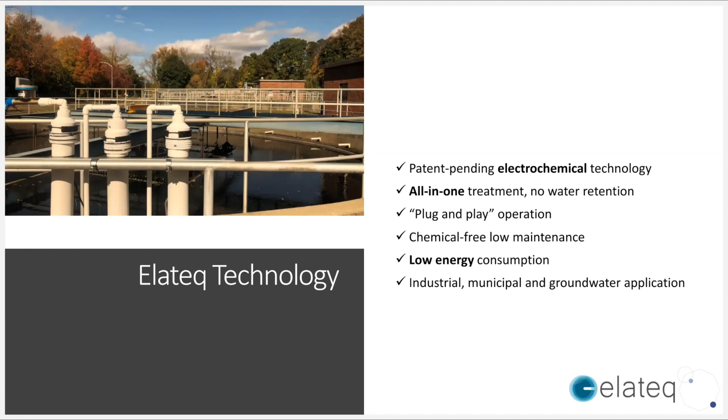The core of our technology, as I mentioned, is electrochemically based, and the innovation behind it and the uniqueness is that it merges different concepts of electrochemistry. I'll just mention a few. It's the use of 3-dimensional electrodes. In our case, that's our proprietary carbon material. It uses bipolar electrochemistry, which is a concept that is used in some systems separately, as, for example, electrocoagulation flotation systems, and conventional electrochemistry used in other applications. So this is something that we managed to merge together to create this powerful technology that can remove a range of contaminants at the same time.

Just an example, if we talk about organic pollutants, our system degrades them or transforms them to harmless byproducts. Whereas when we talk about metals, since we cannot degrade elements further, metals are actually securely stored within our electrodes. And upon saturation, these electrodes actually become a valuable resource for one of our partner companies that extracts metals from different solid media. So this is just to give you a sense that as we are looking at our technology and applications, we are really taking this sustainable approach to close the loop when it comes to waste, when it comes to energy use, and really be in this water energy nexus field as much as we can with the novel technology.

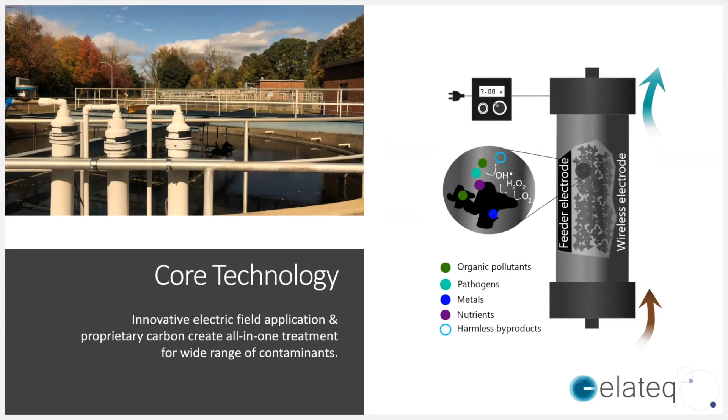Since Elateq was founded, we actually incorporated last year in March, but we established Elateq in 2019. We were awardees of a couple of Massachusetts Clean Energy Center awards, simply as they recognize that our technology is in this water energy nexus. And I'll talk a little bit more about this Innovate Mass project, which is actually a local project to Amherst and of, I think, relevance for this group.

As I move forward, I structured this to introduce our technology in terms of applying it in two different configurations. One is as a flow reactor, as you can see here in these photos, and the other one is something called permeable reactive barrier configuration, which is more applicable for mitigating non-point pollution sources, and I think that's relevant to mention here. And I'll talk a little bit more about that as we move forward.

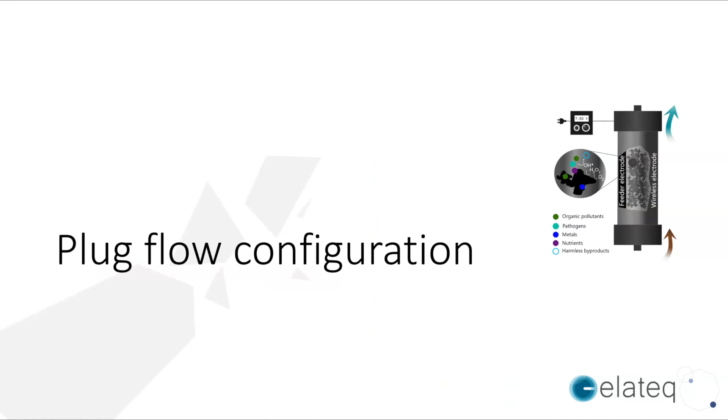So when it comes to plug flow configuration, that means that we use pumps to pump the water through our system. Contaminants get removed, degraded, and then the clean water comes out of the reactor. And this configuration has been so far used in different piloting, lab scale, and demonstration for a really wide range of wastewater. Our very first pilot was at the South Hadley wastewater treatment plant that was funded by Massachusetts Clean Energy Center, where we introduced the 3,000 gallons a day capacity pilot system with the goal to remove E. coli and lower the amount of nutrients in the secondary wastewater, which we successfully achieved over the course of 5 or actually 6 months of the piloting phase.

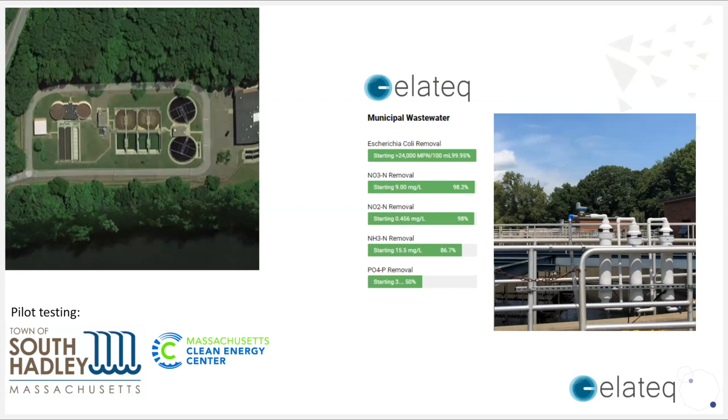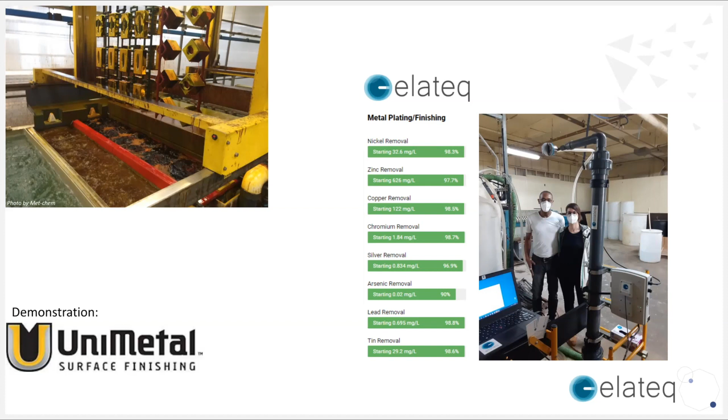Further, what I also thought might be of interest here is the demonstration of our unit at a metal plating or finishing facility. So this is an industrial application of our plug flow configuration, where even though the facility had their own wastewater treatment, the majority of metals, especially chromium, zinc, and nickel, were still above the permitting levels at the facility. So our system achieved these permitting levels, and below that, during the course of 6 months of our demonstration at this facility. But also in addition to that, we managed to lower BOD levels as well as nitrate that were of concern at this facility prior to discharge in the water body.

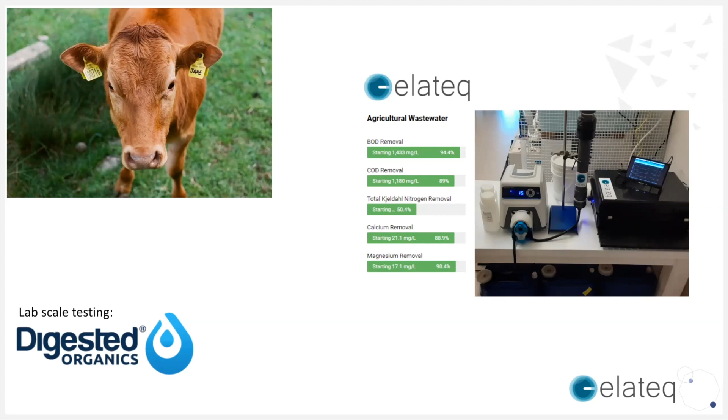And this one is actually also interesting. It's a lab scale testing that we conducted, but it was done for a company that introduces treatment trains for treatment of agricultural wastewater. These results are related to dairy and chicken farm wastewater. So our system was tested as an addition to their current treatment train, where we managed to achieve the desired levels of BOD, COD, and some of the nutrients that they needed to lower prior to finalizing their treatment system as well.

So these are all plug flow, as I mentioned, those are more applicable for point sources, but when we talk about non-point sources, they're a little bit more difficult to address, and permeable reactive barriers, PRBs, are often used for capturing plumes in groundwater. So some of these non-point sources can be mitigated this way. And the principle is that the PRB is constructed and installed permeable to the water flow. The water flows through whatever the reactive media is, depending on the contamination, and then the clean water is leaving the barrier as it flows through.

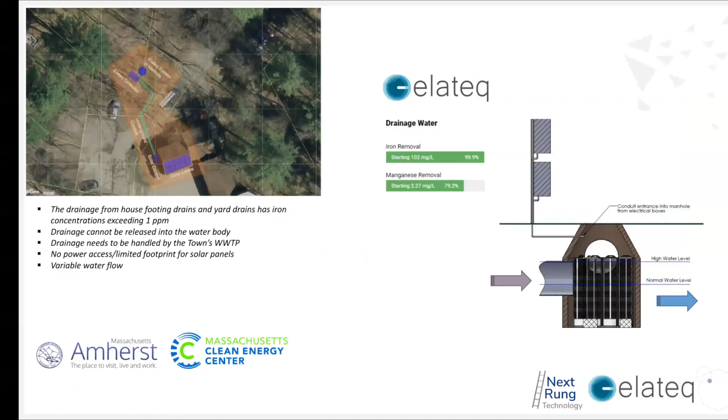So in that sense, our current project with the town, the project that is supported also by Massachusetts Clean Energy Center, is in one of the local areas where the drainage from house footing drains and yard drains has elevated concentrations of iron, and because of that, the water cannot be released into the water body, and it has to be handled by the town wastewater treatment plant.

Some of the limitations that limit which technology can be used for this type of treatment are that there is no power access at the site. There is a limited footprint for solar panels. So even if you were to install, for example, a pump and treat system, you still need a lot of solar panels to provide enough power for the pumps required for pump and treat. And also another challenge is that there's a lot of variable water flow due to seasonal changes, right? So this location required a different solution than what pump and treat systems would allow.

So we redesigned and refined our reactor designs that can be installed in the manhole where all that drainage water is focused to, in order to allow, as the water flows through this reactive barrier, iron to be removed, and the concentration of iron is less than 1 milligram per liter and can then be released into the water body. So this entire system is going to be solar powered. So we are now in the midst of finalizing the assemblies and starting the installation.

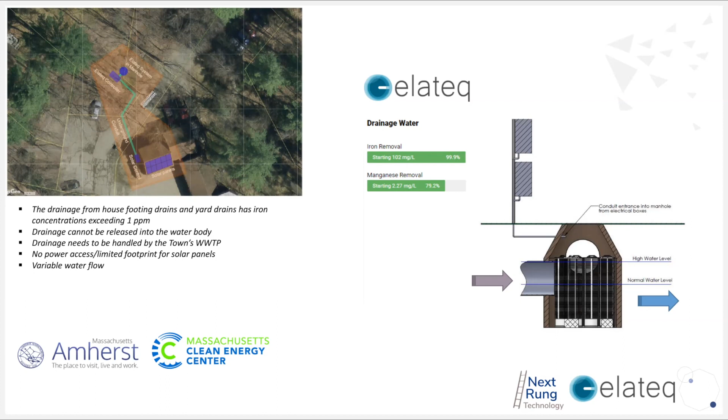And this installation is actually because we are installing our low energy use system, compared to pump and treat. Even if the pump and treat was to include the Elateq flow configuration, it would be significantly less use of energy than any other alternatives. And we estimate that nearly 100 tons of carbon dioxide will not be released into the environment because of use of our system. That's over a 30-year estimation. But significant energy savings, and the limitations of this site are managed by our design.

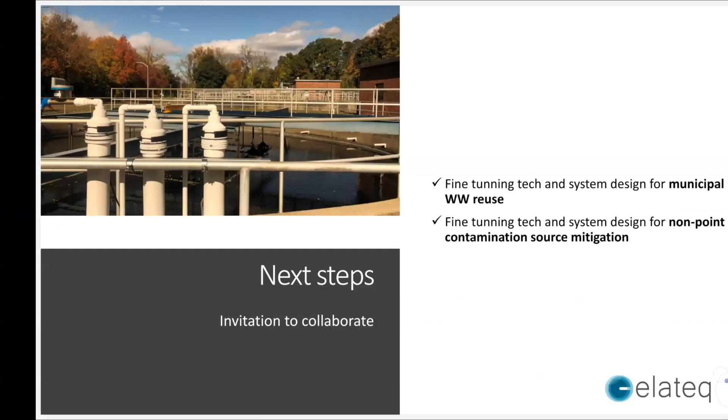I believe this is a great moment to quickly introduce our next steps and invite anyone who sees this as an opportunity to collaborate with us, as we are fine-tuning our technology and system design for municipal wastewater reuse and for non-point contamination source mitigation, where we want to really dig into understanding primary mechanisms for nutrient removal and how we can enhance our systems, because there is a lot of room there for enhancement of nutrient removal.

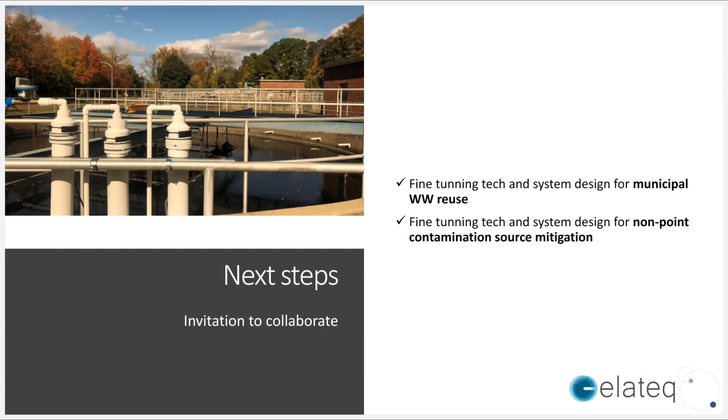That is what we are now focused on. And if anybody sees this as an opportunity to work together for specific sites, as either piloting or research, I'm open to further discussions.